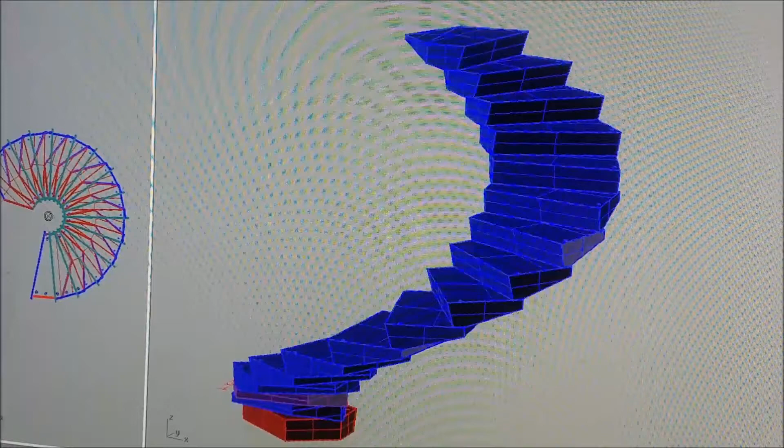They hung from the top, and they have a block that sits against the floor at the bottom. And we're going to use fiber in this along with the rebar, because they're very thin out here at the edge. One of the features of this arrangement is we have a view from the top that you see going up, but we also have a point of interest on the bottom. It's sort of like a backbone of the thing.

I just didn't want it really plain. Just trying to make this twisted smooth curve with the forms is really hard. We learned our lesson on the helical stairs. We're not going to ever do that again.

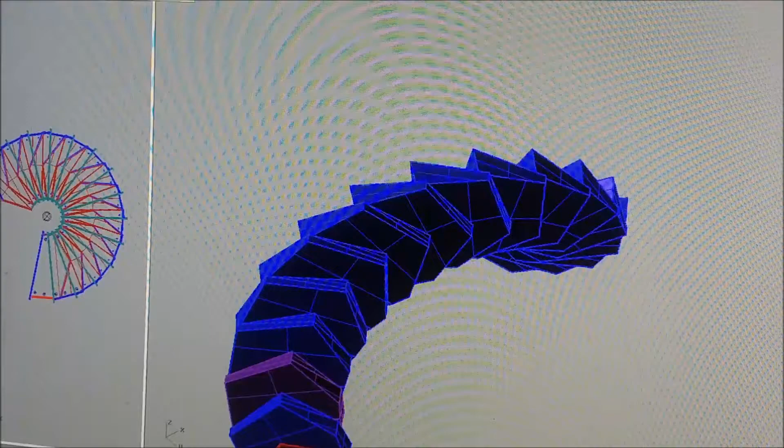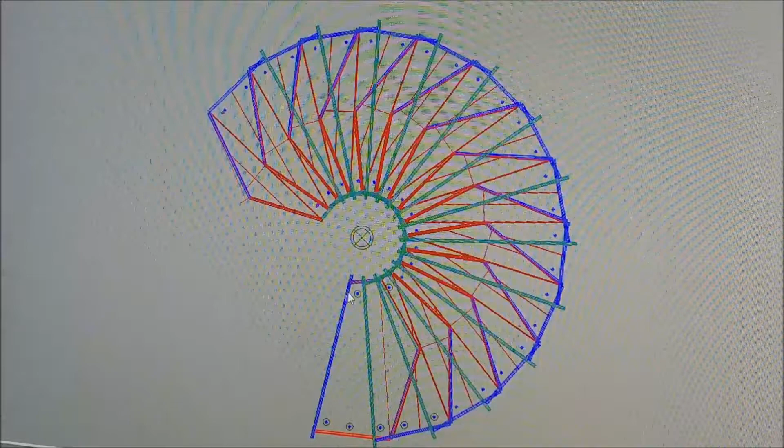Okay, what we're looking at now is sort of the top view of the forms. The trick that makes this thing work is this V shape here. It lets the step work, it's easier to see on this first one down here. See, this would be the nose of the second step right here. That's how far it fits up underneath of the second step. So that's where your support is, this big thick section over here. It gets really thick towards the center.

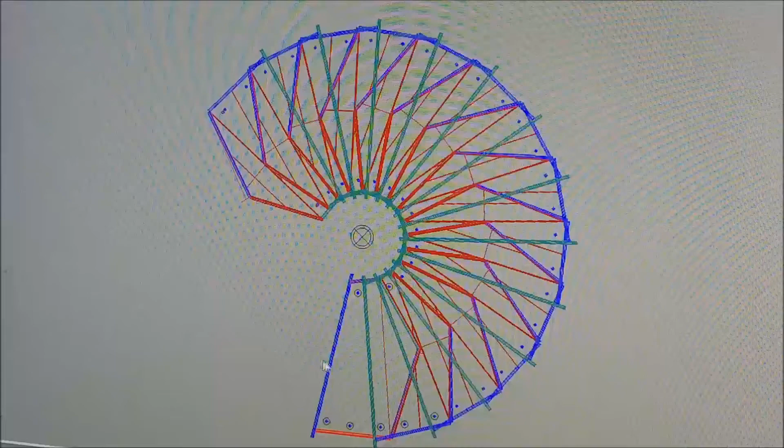Same thing. Well, let's see. Moving on along. Once you get a module that you can repeat, you just lay it out flat.

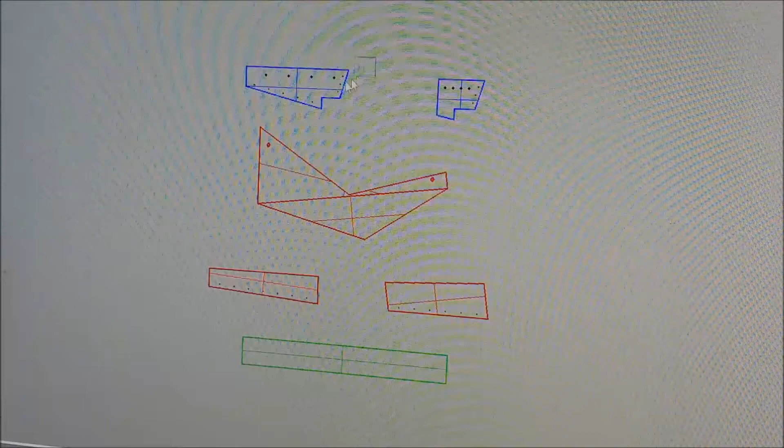In our case, we have 6 pieces to the section. At the top up here, we have rebars that go right through the form and out the other side. They'll be sticking out like 1 inch on both sides, and that lets us place the rebars that go down around the curve. They'll come up underneath this first one over here, get tied to it. That's what holds the rebar suspended in the thing. It has to duck through this line right here. That's running parallel, so it won't have a lot of cover right there.

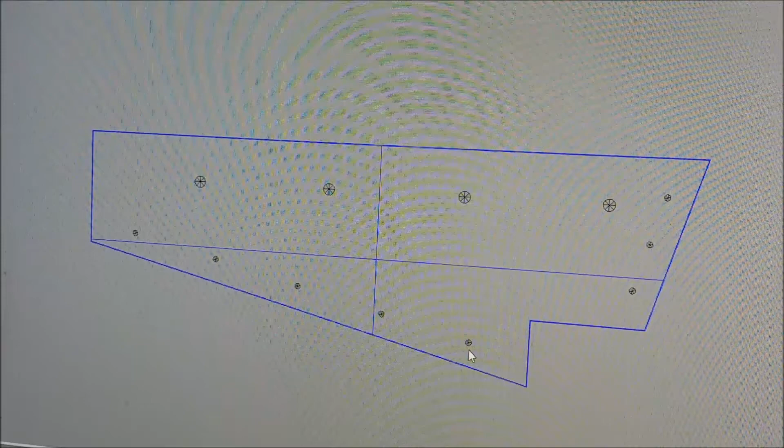And then you have a stirrup rebar, which I haven't even bothered to draw. It's like anybody else's - it wraps around these and bends into the bottom and bends going uphill up here. Also on this, you notice we got where to drill the screw holes. This is because we're using it more than once, and because it saves laying it out. You lay it out one time on the drawing, and then you use it 15 times. Seems like it's economical to me.

And of course, the bottom step has to meet the floor. It's thicker at the back, and the top one's got the surface leveled off. There's nothing that follows the uphill part.

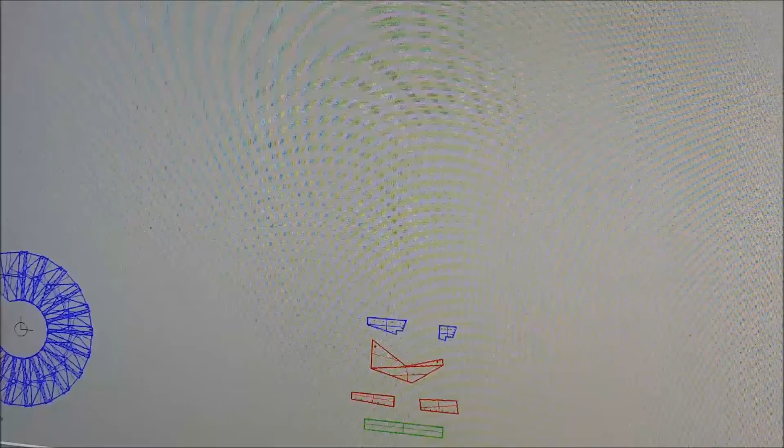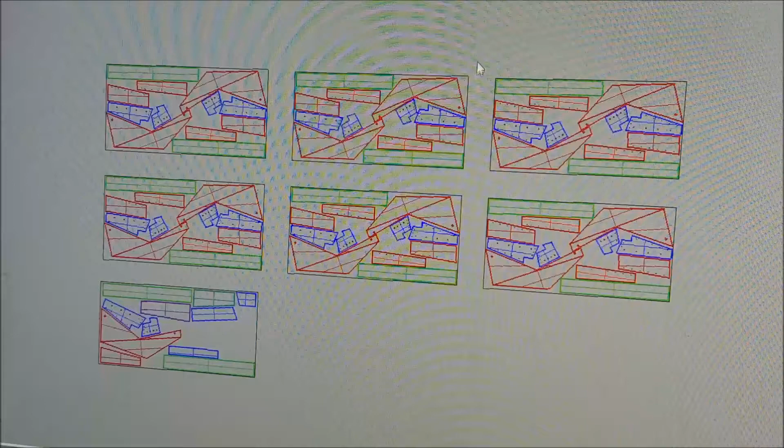Let's see here. Probably this one. There's a little wasted space here and here. But generally, what we do is we come in here with a circular saw and cut over there, and then sort of plunge cut it in here and back up and go forward.

Cut across here, cut across there, cut across here. Getting an idea, right? And this will be gone, so you can go up into here and cut this one out, and then you cut this. That's gone, so you can come up here and cut that out.

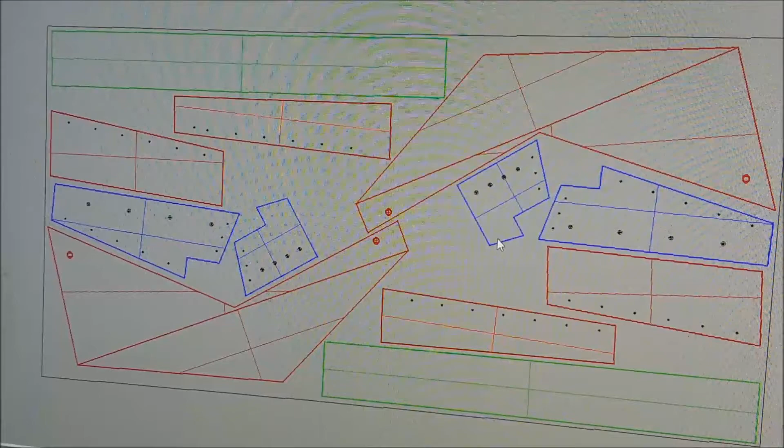And you get handleable pieces that you can either cut with a jigsaw, or my wife uses a bandsaw. Leaves a nice finish, and she likes using the bandsaw - the circular saw is heavier than she wants to deal with. You know, she's over 80, so.

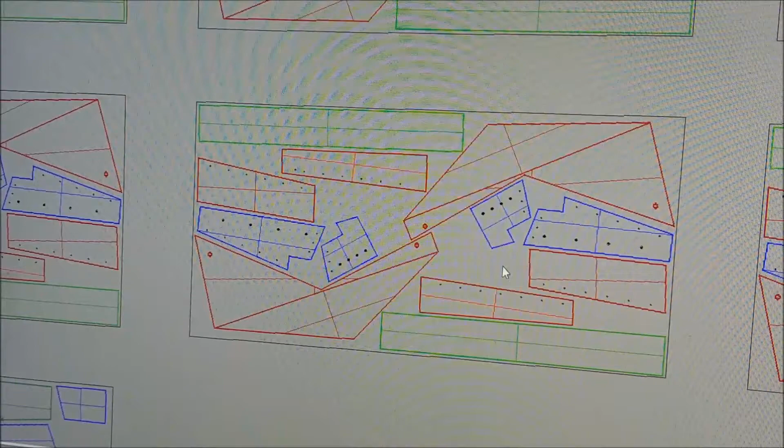But the bandsaw, she's got 2 sizes of them. We have the big one, 18-inch throat, and then a small 9-inch one. It's a Craftsman from, well, I guess it was built in the 1970s. The other one's fairly new - we've only had it about 10 or 12 years.

She made out the window and door bucks, round top things. It's done like this with multiple pieces that overlap.

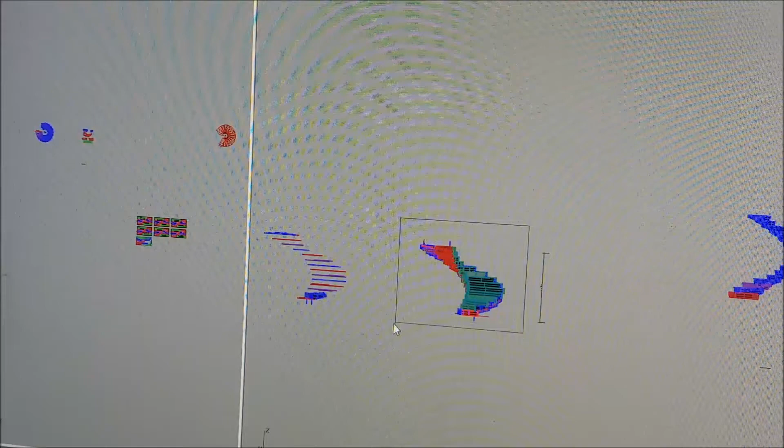The first thing we were looking at was the actual stairs. This is the form.

Probably shove this out of the way.

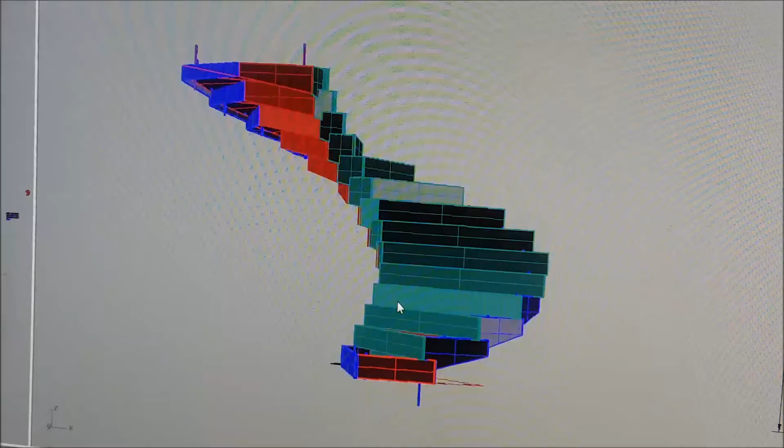Truth be told, the stairs we were looking at aren't the stairs for this form. This is the form we're going to use for the upstairs, from the mezzanine to the roof. All the tops of everything, the roofs, are flat. It's all living space, more outdoor living space than there is inside, a good bit more actually.

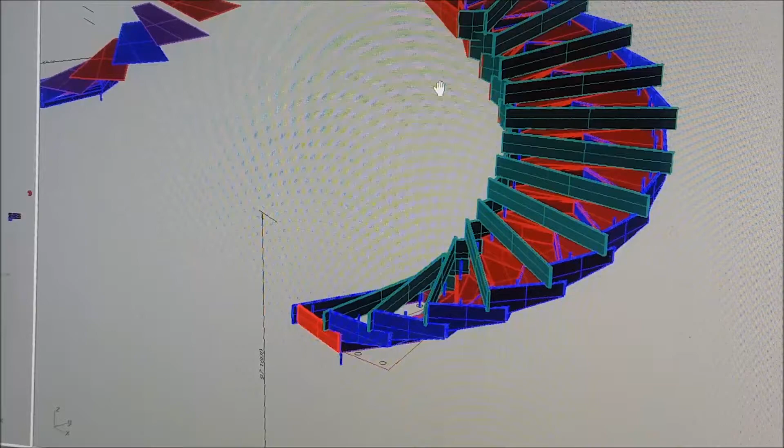Let's just sort of look down in this thing here someplace. So you can see that V that fits into the next step. There's a place that overlaps down here, and we can put a couple screws in there.

Not shown, just because I'm lazy. It's corner block, so it'll be a 2x2 corner block here, and it'll be screwed through this blue piece into the back of the corner block, that's like 3 screws. Then the faceplate here for the riser gets screwed on from the front, and that's got 4 screws.

You take these riser things off as you assemble it, and let you lay your rebar down in this curved tray affair. We'll probably stick some coco lumber on these blue pieces down to the floor to pour it, but after 28 days we'll take them off, because it won't make any difference.

It's self-supporting. The blue things here, this is for a 5/8 threaded rod that comes through the ceiling up above. Those are already in the floor, the holes are in the floor, so we don't have to drill anything and try to miss rebar for 34 hangers.

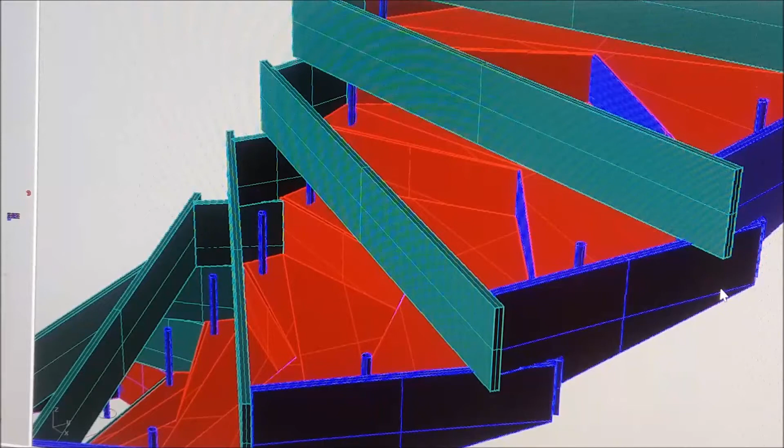And then we got to thinking, we have a window over here to the right, and yeah, the window's over here, and I didn't want to block the light. We're into natural daylight, we want to make sure the house is halfway bright.

Anyway, we're gonna put these 5/8 rods up there, and they sell a stainless steel tube, pretty thin wall, which is good because it costs less, and we don't need it for any structure. What it is, they roll shapes into the outside of it, and people use these things like on procession carriages and such. They're not too awful hard to get.

You can get it in brass, but they're really expensive because brass is expensive, especially in the Philippines. But we're going to either do that or put a cover on out of like Schedule 40, or even Schedule 20 is easy to get in the Philippines, like a 1-inch pipe, and black it out, paint it black.

But anyway, we've changed now, we're going to hang this. The threaded rods are going to come through the same place, top to bottom, because the hole is in the ceiling. But it's going to go right through this tread.

So there'll be one here in the middle, like you can see this one here. It goes - this is all concrete in here - so it's going to go through this inside part of this tread, and then the back side of the tread below it, and then the nut will be on the bottom.

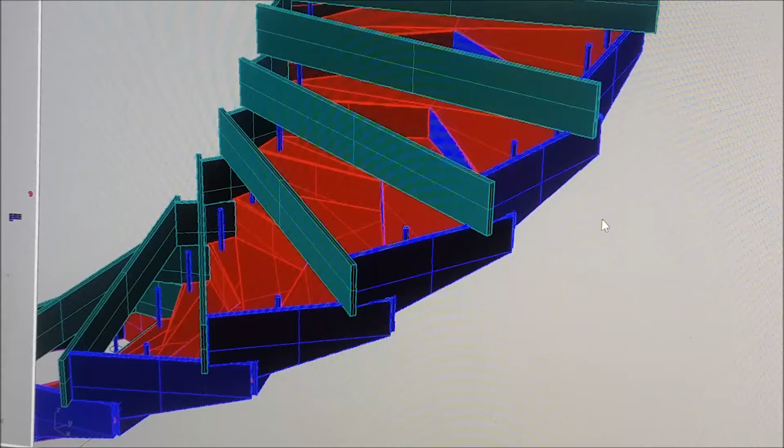The bottom has no bottom. What we're going to do down here, we're going to put a piece of polyethylene on the floor and then set this up.

Now this one, you don't see any screw holes here, I didn't bother putting them on, well, they're not in this drawing at all. Also, this drawing has an error - this facing board is actually kicked out 2 inches at the top. It tilts, it's got a toe kick in it. And you can see that in the parts when we look at the parts.

But we're going to put 2x2s on these 5 bottom pieces, and a couple nails into the floor or whatever, keep it from sliding around. But the polyethylene is there. There'll be a couple dowel pins of rebar down here, but not many. If there's a really bad earthquake, this thing is free to scoot along the floor a little bit.

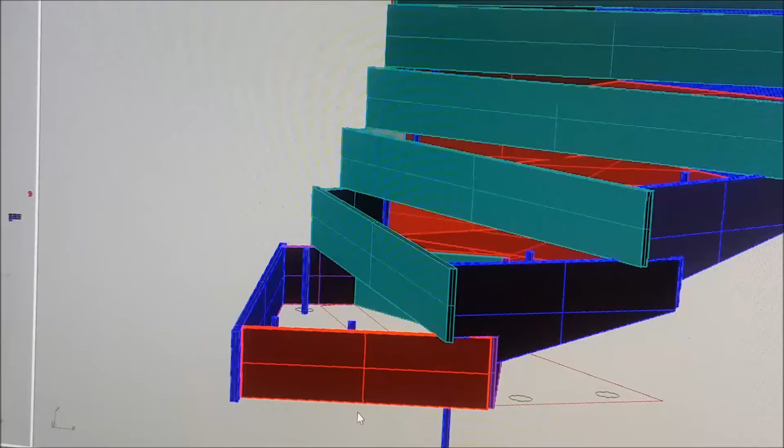You can make things strong, but you can't make them totally rigid, it doesn't work. The native Amakan houses and the squatters' shacks, they come through typhoons much better than solid construction.

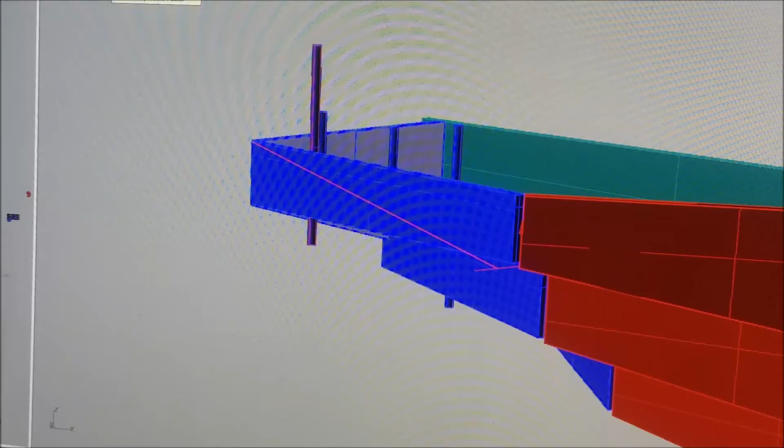That's the tray for the top step. The difference being, well, this would come up to a point up here, a slope, because it's going uphill. This thing is slanted, and this would go up to meet the slanted one sitting on top of it. So this piece is different because the top is clipped off. The rest of the pieces in here turn out to be the same.

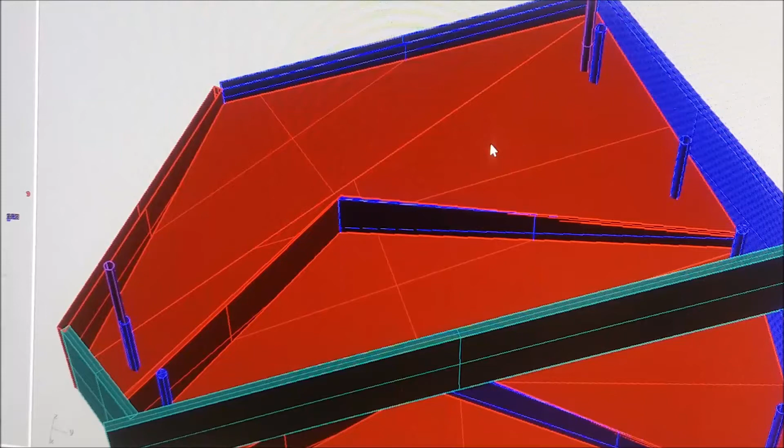One of the design features was to get the weight down. If you were putting the concrete stairs in a wood house, you really don't want a lot of weight. At least I wouldn't. I don't know about the rest of the world.

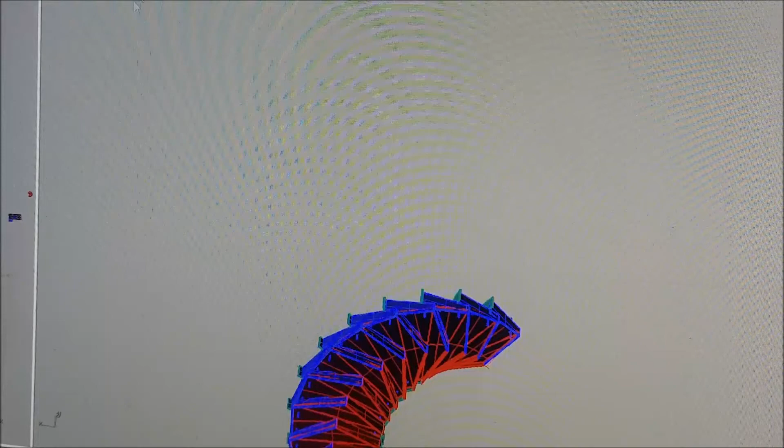This is the form from the bottom. You can more clearly see that on the outside edge we have 1, 2, 3 support rods and dowel pins. This space here we can measure - we have an actual drawing of the house as built, and we could measure this, but it's like 8 inches, something like that.

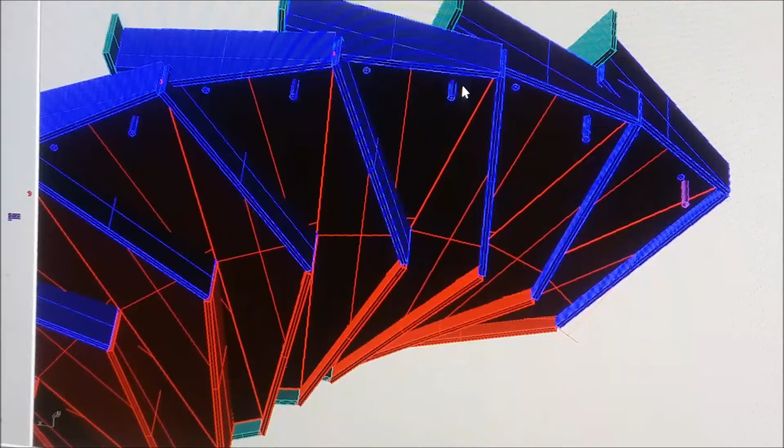It's too wide for OSHA code, it has to be under 4. But we're not building to OSHA codes, we live in the Philippines. OSHA wants to build a house, let them build their own.

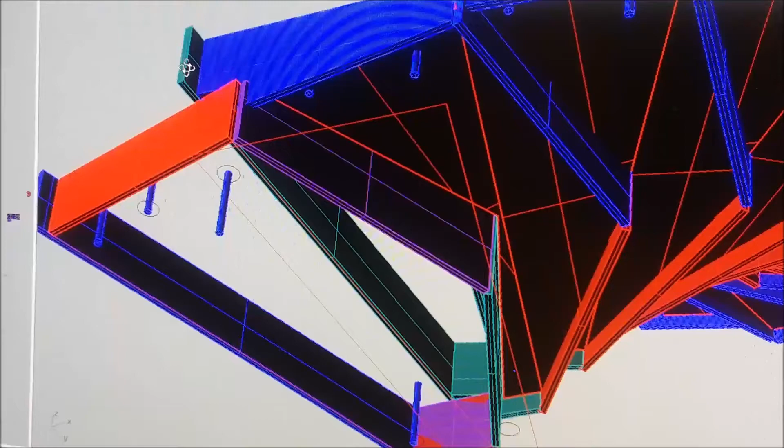Of course, this bottom tread is full height here because there's nothing slanting up to make it less. We're trying to get this profile thin, but you can see it's not a flat bottom, it's sort of an undulating bottom where the rebar goes. But having these ones across the stair tread, that's like putting the rebar on top of a slab.

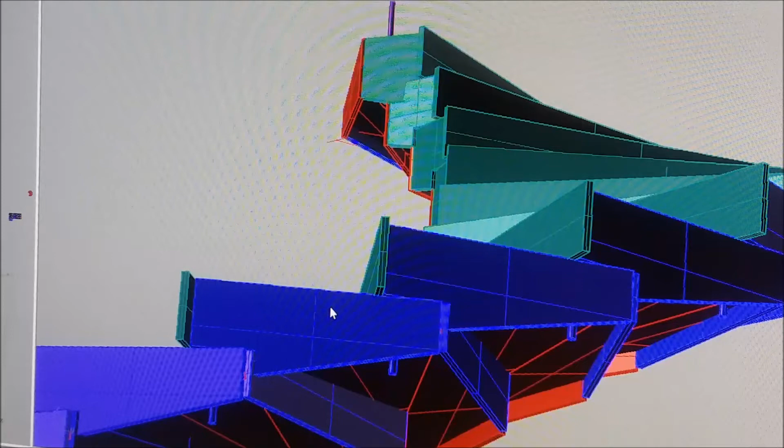I think we'll look, maybe this is what I want. Okay, this is the stairs for the mezzanine going up to the roof.

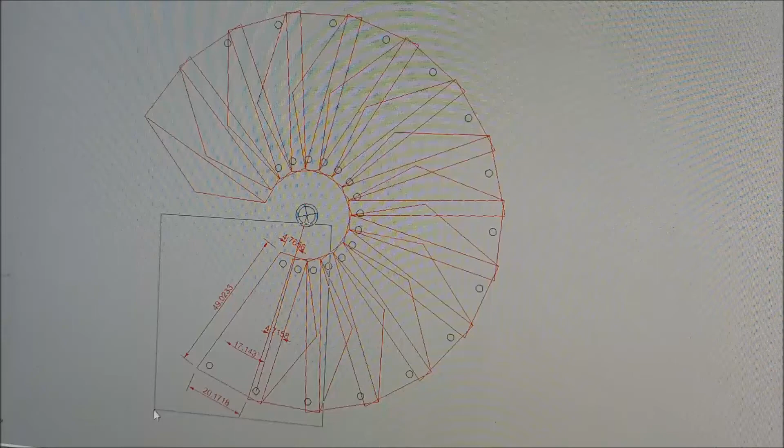Now it looks like 4.76, that's less than 5 inches of tread width on the inside. But that's not the usable part of the step, because you have these rods coming down through here. This inside wouldn't actually pass code, I believe. The outside will.

So you can't put your foot where that rod is. So you're really looking at a width out here which, I don't know, it's 6 inches or something. It's not really usable for going down. It's usable for going up.

Down here at the bottom, we're looking at 20.17 - 20 3/16. And again, you can't use that full width because you have these rods going through there, the vertical support rods.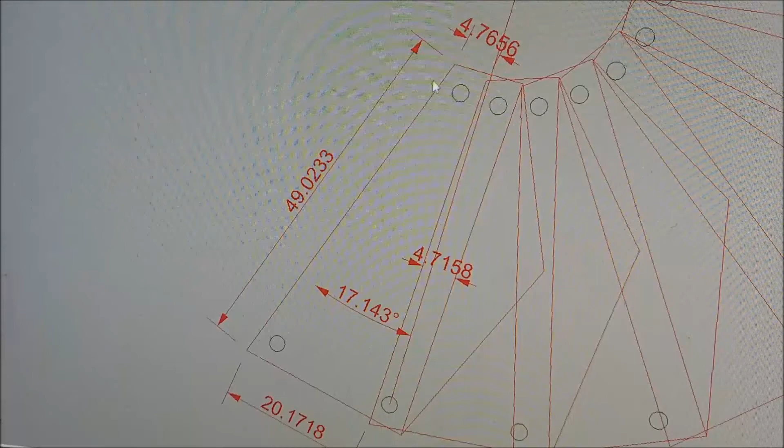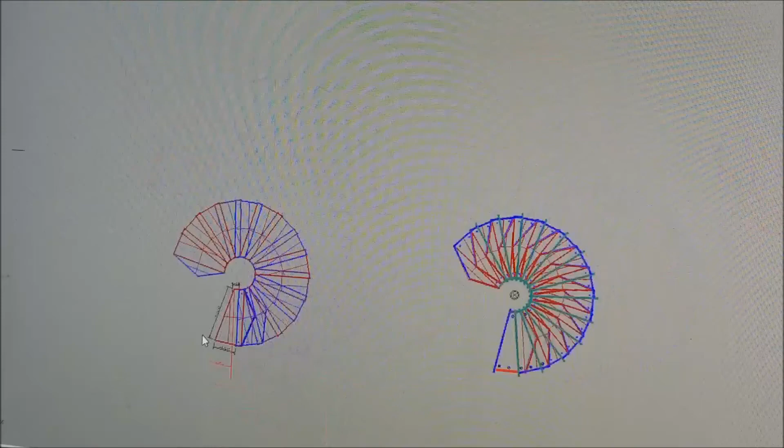These stairs here, they got a 49-inch nose on the step. Now, the blue one in the picture we were looking at - well, that's not it, to be sure I've not thrown it away. Okay, this one, the usable part of the steps is what the dimensions are.

Because these pins here are dowel pins for the forms. This is all concrete. The rods on this type here - this is an outside staircase, and we want where we're going to put it by the dirty kitchen, we want to have that floor-to-ceiling pipe making the cage around it, and we'll probably add a couple on this side here.

Intermediates to get them down to below 6 inches. Want them wide enough that the neighborhood kids can't get their heads stuck in it, but small enough that an adult can't climb in it.

Now what we need is a security gate across the bottom of the stairs, because this will give access to the whole top of the house. All you have to do is walk through the dirty kitchen, and you're in.

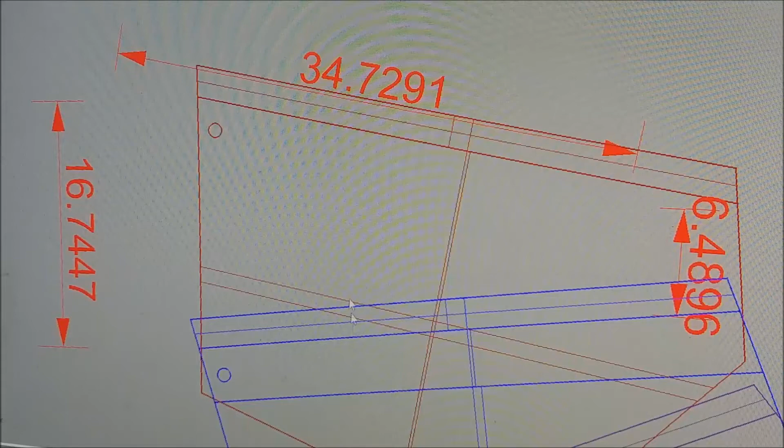34 and 3/4 basically, with steps on here. This is only for outdoor access to the top of the dirty kitchen.

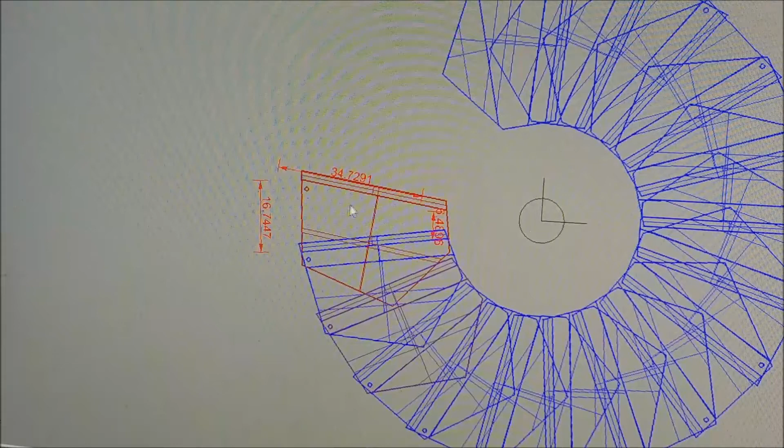We're going to have some, what do you call it, round tables with the seat thing around it and a beach umbrella on them. She always wants to sell food, and I don't want to pour a separate place - out of sight is out of mind, you know. The dirty kitchen is like 16 feet by 26, so she could have like 6 tables up there, and this is access to get up to it.

But there's 2 completely different staircases here. One's 3 treads higher - this one here is 3 treads higher, but they all look alike from a distance. Now this V on the back is what makes it work being thin.

You can put this particular tread box together backwards, mirror image. So you could come up here and make a curve, then flip it and make the curve go the other way for a while, and that's why I call them serpentine stairs.

Now, if you wanted a smooth transition, this V shape back here, you could connect these 2 ends, and you circle through 3 points, and that would give you something that can swivel around, and you could really make a serpentine. Like if it's a garden path or something, where you have to come down from a road and you need a lot more treads - you need more run than the site allows.

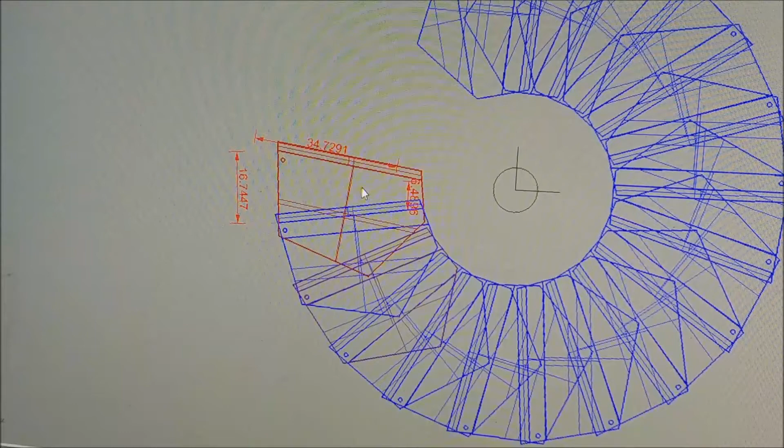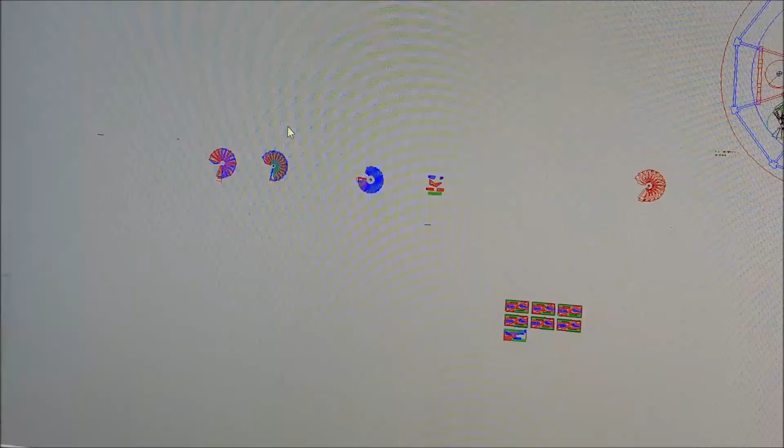Is that all there is about this? That might be. I think this is a flat drawing, I don't think there's any 3D to it. Where's the one with the stair tread? I'm trying to make this not too terribly damn long.